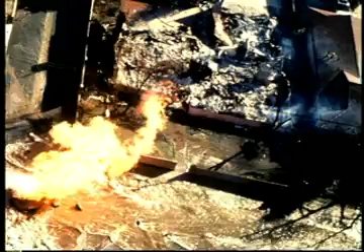Northridge, California, January 1994. For anyone that remembers that day, the images of devastation are frozen in memory. The earthquake destroys or damages infrastructure and buildings, but less than 100 people perish. Once again, modern seismic engineering has done well to protect lives.

Yet this earthquake is the costliest in U.S. history. Even though they save lives, buildings are left uninhabitable and must be demolished. Can seismic engineering do better to protect that infrastructure and preserve communities in the aftermath of an earthquake? That is what a consortium of the National Science Foundation, the construction industry, engineers, and universities is asking with the Precast Seismic Structural Systems, or PRESS program.

The PRESS program is one phase of a cooperative US-Japan program on large-scale testing of structures for earthquake and wind resistance. This particular program, which involved cooperative research between Japan and the United States on different aspects of the seismic performance of precast concrete, initiated about 10 years ago when I developed a plan for the US program.

The final phase is this large-scale test of a 5-story, what we call super assemblage rather than a building, to see how all the bits fit together and to make sure that when we test a real building that it does what we expect it to do. The key to the success and effectiveness of the entire program has been the partnership of industry and academia.

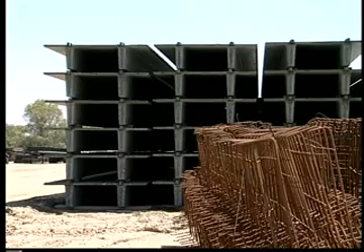The material which comprises this product is precast concrete, or precast, a hybrid system which combines the structural properties of concrete and steel to create a material with unique capabilities.

Precast pre-stressed concrete in a lot of ways is as different from concrete as wood is from steel. All concrete products have steel in them, regular what we call rebar, mild reinforced steel. Well, steel is best under tension. In other words, you want some tension on that steel for it to be able to work as it was intended. Concrete is best in compression.

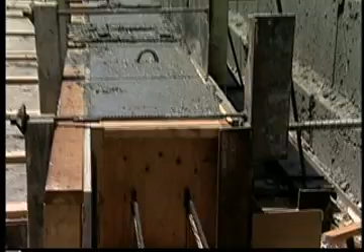So what we are doing with pre-stressed concrete, we use special strands of high tensile steel that is tensioned prior to pouring any concrete around it. We place concrete around that cable, and once the concrete has achieved sufficient strength, it actually bonds and holds on to that cable. So once it has that sufficient strength, we cut that cable.

Well, at that point, that cable is trying to relax. It's trying to go back to its original configuration or shape, but it can't because it's got the concrete bonding to it. So the steel is in tension, and the concrete, because it's holding this steel, is being forced into compression. So you have steel in its best application, tension, and concrete in its best application, compression, in pre-stressed concrete products.

Despite these inherent advantages, precast has not been traditionally used in seismic systems. PRESS will prove that with new designs, these advantages can be used to create better buildings. Precast concrete is not used all that much in seismic design in the United States at the moment in seismic areas, and the reason for this has been poor performance of precast buildings with inappropriate connection details in earlier earthquakes.

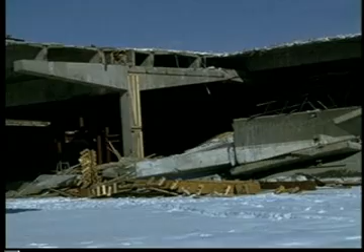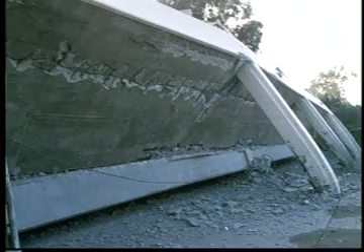In particular, in the 1964 Anchorage earthquake, it got a bad reputation as a consequence of that. Subsequently, it has performed poorly in a number of other earthquakes. The Armenian earthquake of 1988 is another example, and even the Northridge earthquake here in the States of 1994, some precast structures again performed poorly, again because of inappropriate connection details. And obviously we're trying to change that picture.

The way we've done a lot of the design of this structure is to try to make the deformations, the places where the structure has to bend and yield, happen in the connections between the different pieces. Now, if you're building a cast-in-place concrete structure, then there are no discrete connections between discrete pieces, and you don't really have that option. But with a precast structure, you can actually do that. And that's one of the lines that we've tried to take when designing this structure.

We are concentrating all of the inelastic action in the connections, which is quite different from the way in which precast concrete has been designed in the past, which has been emulating reinforced concrete, trying to make it exactly the same as reinforced concrete. We're not trying to do that. We're trying to make it quite different.

Standard construction for seismic systems requires that a building damage itself in order to save the lives of the occupants. Engineers do not try, in general, to keep a building intact after the earthquake. We allow structural damage. This is condoned by the code. This is what we're supposed to be doing in order to protect the lives of the occupants.

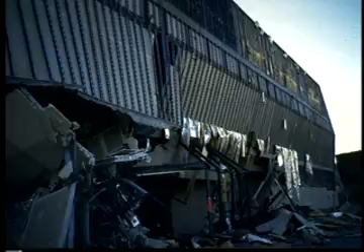The question is, how can you have a building that after an earthquake is still occupiable? That's not what people are getting now when they buy buildings that meet code, and any engineer will tell you that. These systems that we're testing here actually go a step further, and they're trying to minimize structural damage in the event of an earthquake.

To prove these new systems, the project's research tool will be the largest structure ever tested in U.S. history. It is known as the PRESS Phase 3 5-story test structure, and it will be put through the final trial in a unique facility at the University of California's Jacobs School of Engineering.

The Powell Structural Research Laboratories are a university research facility for the large and full-scale testing of structural systems and structural components. We have right now 4 large and full-scale testing laboratories which comprise the Powell Structural Research Laboratories, and with that it is the largest structural university laboratory anywhere in the world.

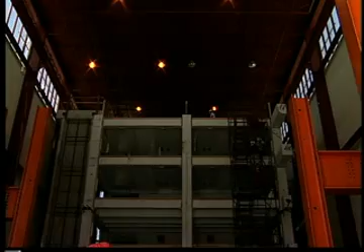This particular building is called our Structural Systems Research Laboratory, where we actually test full-scale structural systems, buildings up to 5 stories tall or bridges with over 100-foot length. We can test structures under simulated seismic loads here in our laboratories.

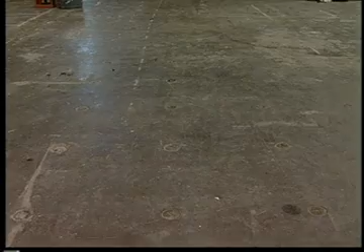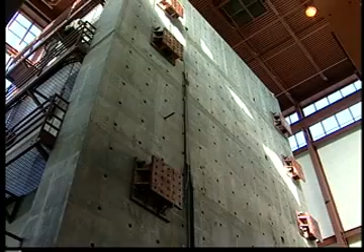For that, we really need very strong reaction floors and strong reaction walls, and this is really the key feature of that laboratory, that we have a 50-foot reaction wall against which we can load up to 5-story full-scale buildings under simulated loads all the way to failure.

The test structure is intricately designed to represent and test a host of new and different methods to join precast components into a robust and resilient structure, a structure known as a seismic system. In earthquake country, we need something called a seismic system. You need to resist the horizontal forces that the buildings get in the earthquake. And so you need a special system that holds the building up instead of letting it tip over like a house of cards. And what we're testing here are 5 different seismic systems.

One of them is a wall system, and the other 4 are 4 different frame systems. By frame, I mean things consisting of columns and beams. The point of this structure is to try to pull together a lot of the individual connections which have been developed and tested as individual connections over the past 5 or 6 years. And the intention here is to try to pull those together in a structure and then load the structure as if it really were being hit with an earthquake, to observe the way that the connections really work when you have them in a real structure and they're all tied together and all the pieces have to work together.

All the systems being tested in the structure utilize an emerging new seismic design philosophy. The design of the structure, or the prototype on which this test building is modeled, was using a new procedure called displacement-based design, which we've developed here at San Diego, essentially. And in this, we concentrate on trying to make the building respond to a particular level of displacement in an earthquake, rather than to have a particular strength.

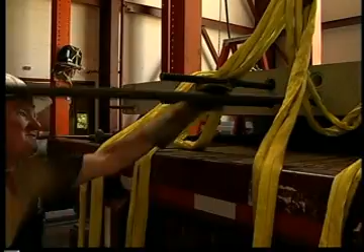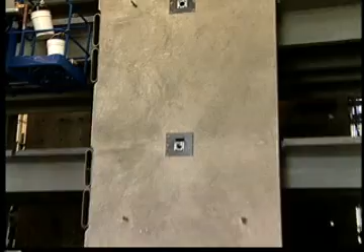And they're held down to the ground by what we call post-tensioning tendons. And these are essentially enormous rubber bands made of very high-strength steel. So they're not made of rubber, but they behave like a rubber band. And so you put the wall down and you have a tube down through the wall, or a duct, and you stress this steel through the duct, and essentially that kind of clamps the wall down on the ground. But if you push it hard enough, instead of something breaking, it'll simply lift off on one side a little bit, so the wall will kind of rock over like that, and then the big steel tendon down the middle will just pull it back up straight again when the earthquake loading disappears.

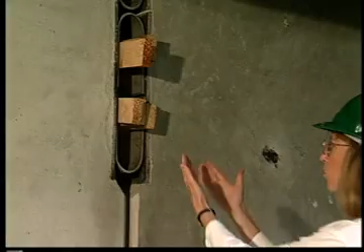This post-tensioning is in a sleeve inside the wall, and it is not grouted, it's not bonded to the wall itself. And as the earthquake hits the building, the wall panel just rocks back and forth, and this post-tensioning pulls it back to its vertical position. The thing that's unique about the system that's tested in this building is actually this U-plate connection. The U-plate connection used here in the interface between the 2 wall panels actually rolls as the panels rock back and forth. The U-plate rolls and it dissipates energy as it yields right in this region of the U-plate.

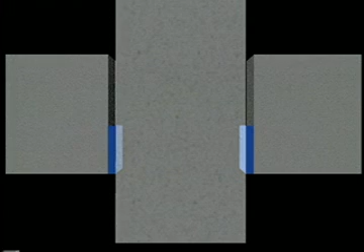The seismic frame systems will all be tested at the same time. The hybrid and pre-tensioned systems form the east side of the building, and the TCY and TCY gap connections form the west side of the structure. In the TCY gap system, there is a small gap between the end of the beam and the face of the column. The bottom portion of this gap is filled with grout to provide contact between the beam and the column. They are connected by two steel post-tensioning bars which run the entire length of the building, clamping the frame together.

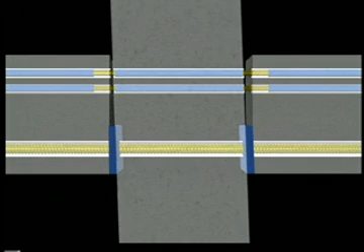At the top of the beam, regular rebar extending the length of the beam and through the column is grouted in, except for a short length at the gap between the beam and column. When the beam moves laterally in an earthquake, the gaps at either ends of the beam open and close an equal amount, maintaining the dimensions of the frame system.

Above the TCY gap connections on this side of the building, the TCY connections model a system that is similar to what is used in conventional cast-in-place construction. The TCY connection only uses rebar which is grouted in except for a short length at the beam-to-column interface. This connection is included since it emulates current use of precast beam connections.

On the other side of the building, an innovative concept called unbonded prestressing is used. In terms of the use of unbonded prestressing in precast structures, we might have a beam and another column on either side of it, and then another beam, which you can imagine each of these have been precast separately.

And then we have a series of ducts or holes right through them that we stretch some high-strength steel. We pass the high-strength steel, we grab it at both ends and anchor it to the ends of the system. And that puts compression across all of the construction joints, all of the joints between the beams and the columns.

Now, in previous prestressing of structures, normally the duct where the wire is passed through would then be grouted solid so that at all points along the length the tendon, that's the steel inside, is bonded to the structure, that's to the concrete. What tends to happen then is if you have a joint between, here's a beam on this side and a column here, as that joint opens up, it causes the prestressing tendon to gain a lot of strain and then go into the inelastic range. As it closes again, we lose some of the prestress.

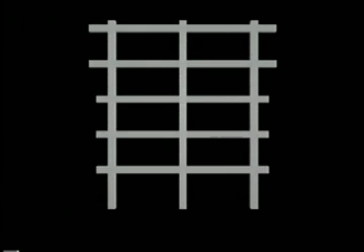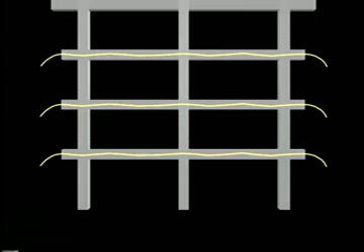Both the hybrid connection and the pre-tensioned beam, which form the east side of the building, use variants of Nigel Priestley's basic concept. The hybrid connections on the bottom 3 floors consist of beams which utilize unbonded post-tensioning strands that run the entire length of the building through a duct in the beams and columns. These strands are tensioned to clamp the frame together.

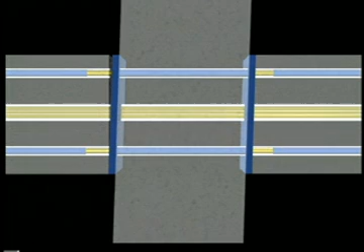Regular rebar at the top and bottom of the beam runs through the column and is grouted except for a short length at the end of the beam. When the beam moves laterally in an earthquake, the rebar yields, dissipating energy, and the high-strength strands remain elastic, moving the frame back to center after the quake.

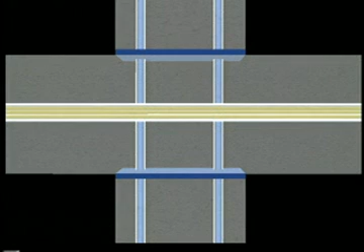Above the hybrid connections is the pre-tensioned beam system. It consists of long beams with pre-tensioning strands inside the beams, which are only bonded to the concrete at the ends. These beams are then set on one-story columns with reinforcing steel extending through the beams. As this frame displaces laterally, the unbonded strands remain elastic and recenter the structure after a seismic event.

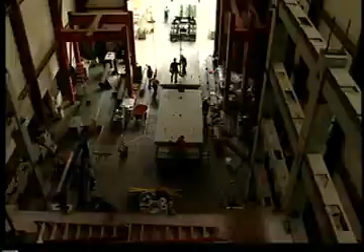All these various systems have been carefully integrated into a structure that is designed at 2/3 scale so that it can fit in the huge Powell Testing Laboratory. Even though it is the largest lab of its kind in America, one of the challenges of the entire project is erecting the largest test structure ever built within the walls of this cavernous building. It was the charge of this man, Randy Clark, who directed a team of only 6 workers to erect the entire structure in merely 9 days.

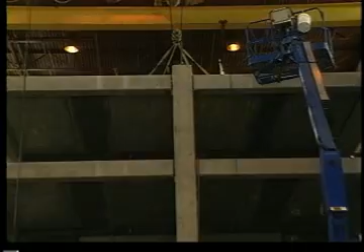The biggest challenge in erecting this building is the confinement that we're in within this lab, and the building fills it up quite a bit side to side. The structure consists of 8 columns, approximately 12 double T's, 20 floor slabs, hollow core and actuator panels, 4 wall panels, and the rest consist of several different types of beams. The heaviest piece was about 19,000 pounds, the pre-tension beams right up above us over here.

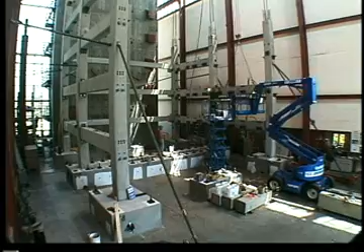We began the erection with the columns, and then we began to stabilize the structure by setting the beams along each floor at each elevation. And then we began setting the floor slabs.

The complexity is definitely due to the reason it's a test structure. They have 5 different building type systems and different types of connections that they're testing all at once in this building. And the crew's done very well so far as to get every piece in with all the necessary parts.

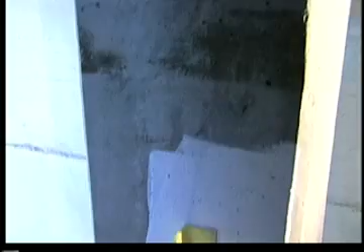The final steps in constructing the test structure are critical. Most important is the post-tensioning process, which will give the structure its innovative performance characteristics. But prior to the tensioning process, the joints and internal connections in the frame systems are grouted, establishing the tight tolerances between the frame elements and establishing the carefully calculated bonds between the concrete components and the internal steel, which will dissipate and control the seismic energy applied to the building.

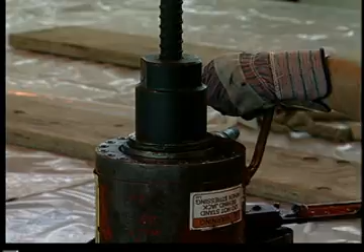With the grouting complete, the tensioning process commences. The nearly 50-foot rods in the shear walls are tensioned, the rods which will flex and then restore the shear walls to their upright position. In the frames, both the rods and strands are drawn tight, putting the steel into the optimum state to control seismic loads. The feat of installing the largest test structure is not all that must be done.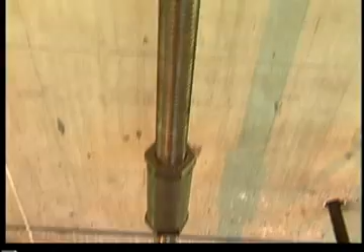A tower to support the actuators for the wall testing is constructed. The tower must resist lateral force like the immense strong wall. To accomplish this in the confines of the lab, the narrow tower is stressed to the lab's floor with high-strength steel tensioning rods running the entire 50-foot height of the tower and deep into the floor of the lab. The rods are tightened to apply 4 million pounds of force on the tower, thus increasing its rigidity and resistance to lateral force.

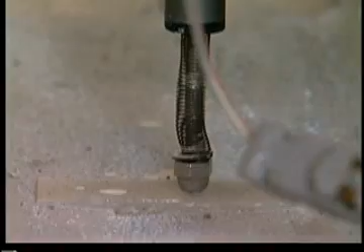With the tower and structure complete, it is time for the researchers to instrument the structure for testing. The building components already contain a multitude of strain gauges which were embedded during manufacture. Countless connections are made to the sensors. Gauges are placed to monitor every movement and displacement and to provide the critical feedback which will allow precise control of the test's immense forces. And finally, a device for instant reference is installed on the structure.

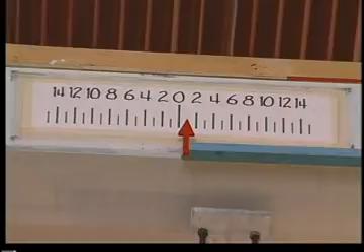The core objective of the testing is to study the structure's response to earthquakes. But how are the effects of a seismic event created inside a lab? Here at UCSD, the cadre of seismic design and testing experts has the ability to employ a technique called pseudo-dynamic testing to faithfully recreate the effects of an earthquake.

The principle of pseudodynamic testing is that we combine computer simulation and physical testing in one experiment. So we have a full-scale model of our building essentially on the test floor. That's the physical component. And then we have a second model of our building in the computer. And in the computer model, we introduce then the actual ground motion.

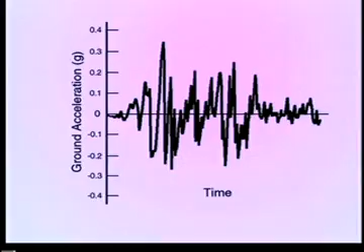So we expose the building in the computer to a ground motion time history, which is pre-recorded from some other earthquake. And then we calculate in our computer model at a certain time step, let's say 1/100th of a second into the earthquake time history, the displacements at each of the 5 floor levels in our building. And then we send these displacement signals to our servo-controlled hydraulic actuators, which are arranged between the building and the reaction wall. And we move these actuators to these displacement levels. So we put the building in the calculated displaced shape.

The reason that we can slow the earthquake down in this form of testing and still have valid results is because we ensure that the sequence of displacements that we put on to the building is the same as would happen to the structure if it was tested at a faster speed, in other words, at the correct loading rate for the earthquake. And damage is related to displacements rather than forces or anything else. So if we take it to the same displacements that would happen in the real earthquake and in the same sequence, then we get the correct levels of damage.

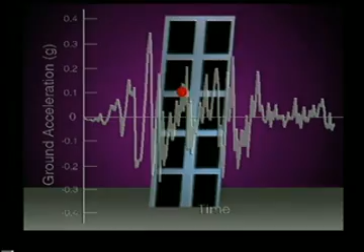In fact, we get slightly more because it's more severe on a building to hold it at the large displacements for a period of time than it is just to achieve it for a fraction of a second and take it off. So it's slightly conservative, but it is realistic.

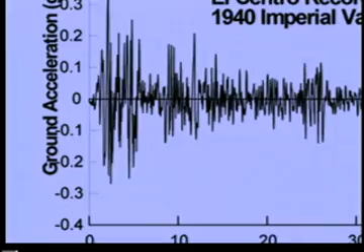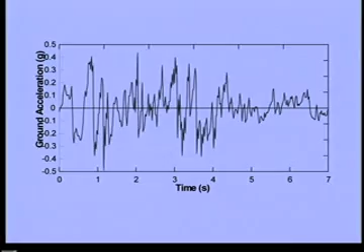The simulated seismic events for the pseudodynamic process are derived from a select variety of actual earthquake records, among them the 1940 El Centro earthquake record. These records are then modified to ensure that the structure is thoroughly subjected to the required levels of seismic intensity and beyond. The mechanical means which will bring the earthquake record back to life are the actuators.

Well, these actuators are kind of like the rams you see on bulldozers moving the blades or on any kind of earth-moving equipment, except that these have electronic controls. For this particular test, we have 10 different actuators. We have 2 at each floor level. They come in different varieties with strokes from plus or minus 6 inches for the first floor, all the way up to plus or minus 24 inches for the top floor.

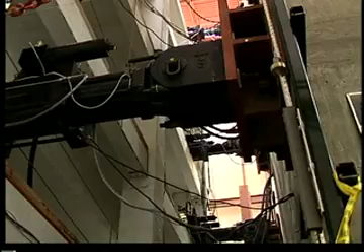The actuators on the first floor have a 165,000 pound load capacity. Those at the top floor have a 220,000 pound load capacity. This actuator here, for example, can push with a load of 165,000 pounds. That's something around the weight of like a 727 or a 737 jet aircraft. The actuators are kind of unusual in that we have this combination of really large forces, but yet we're able to control them down to very, very small displacements on the order of 1,000th of an inch.

In the control room during the test, there'll be 5 of us. There'll be me. I'll be controlling the actuators and monitoring the health of the actuators and the data acquisition systems. There'll be Sri. He's monitoring what's actually going on during the test and conferring with Dr. Priestley to make decisions about what we're going to be doing next, whether the structure is behaving as we want it. There will also be 2 graduate students, Jim Conley and Stefano, and they will be doing close to real-time analysis of what's going on in the structure.

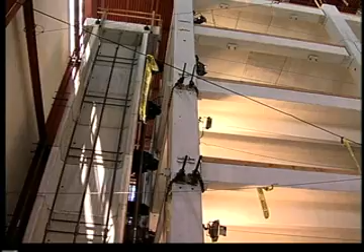The test actually takes place in several intermediate tests, and between those tests, these 2 graduate students spend a lot of time helping us make decisions about what we want to do on the structure next. The structure is ready for testing. 12 years and countless hours of design and preparation have gone before. The testing begins. Time-lapse footage compresses the process.

The team watches closely, monitoring the activity of the actuators as well as the response of the structure. A graphic display shows the amount of force the actuators are exerting to produce the target displacements. As it is subjected to the first loads, the structure makes evident its response to being displaced. I think it's probably the pins, I guess, is it? Something slipping in the pins, I think. Yeah. Okay, just hold it there for a minute.

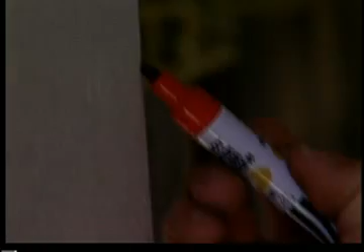The structure shows other evidence of its response to the seismic loading. Throughout the entire testing process, the team will inspect the structure for any cracking. The cracking doesn't affect the integrity of the structure, but the evolution and character of the cracks will help the team understand where and how forces were distributed in the structural elements, and how the structure is responding to seismic displacement. They carefully mark the occurrence of the cracks, eventually leaving the structure graffitied with a glyphic record of its performance. The structure successfully withstands the design-level earthquake requirements. We are right on.

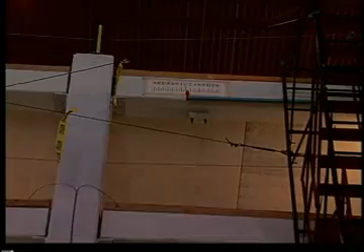Now it is crunch time. It will be taken to the extreme. The displacement will be equivalent to an earthquake which might occur once a millennia. The top floor of the building will move over 11 inches from center, or over 22 inches back and forth, much greater than the movement which occurred in only a few seconds in El Centro in 1940. A few seconds which had devastating consequences. Here, the duration is a matter of hours. Yet the structure is actually subjected to more stress than in that real seismic event.

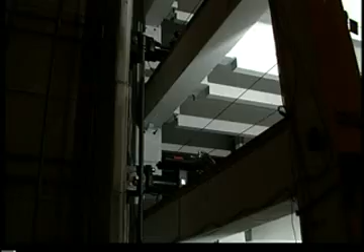As the test progresses, displacement becomes clearly evident. The flex plates in the walls bend as designed. The top floor moves further and further from center. The columns clearly leaning. At the height of maximum displacement, the researchers clamber over the structure. Floor by floor, they inspect and record evidence of the displacement's effect, so they can later correlate it with the data gathered by the instruments.

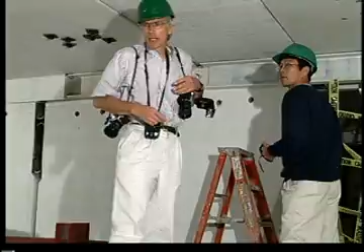Yeah, we got the torsional crack in the floor. You got a torsional crack now? In the floor, yeah. 0.1 millimeter. Not going to get too excited about that. Think bigger?

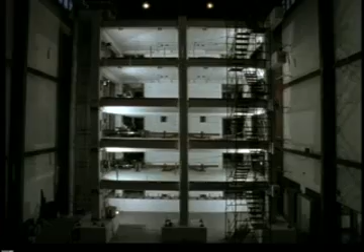Time-lapse footage reveals how the pseudodynamic testing process eerily recreates the earthquake. The building experiences the first seismic wave, and then suffers a remarkable displacement, and continues to sway with subsequent seismic waves. But the walls, frames, and floors stand, and by all accounts, don't even approach a loss of integrity. The lack of damage has surprised even me. It's been less than I expected, so it's just been great.

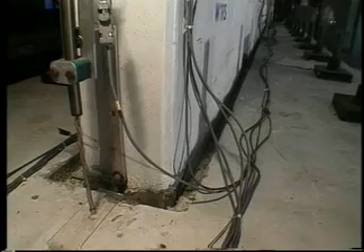It's a superb test. It's amazing to me how little damage, how little distortion, things are able to move the way they're supposed to without anything bad happening. And if you had this kind of an earthquake, of course you're going to run out into the street probably when it's over, you're going to come back in and see architectural and interiors type damage, but the building structure is going to be fine and you'll be able to go right back to work. And I think that's amazing for an earthquake this size on a building.

If this building had been in Turkey, at Izmit, pretty much at the epicenter, I believe that this is about the kind of level of deformation it would have seen there, and at the moment it looks like it's coming through with barely a crack in it, which is, I think, what a lot of people out there would have liked to have been in a building like that.

There's no doubt that the level of shaking represented by what we've put onto this building is well above the design levels for buildings in California. But it seems that the performance we're seeing at this displacement is actually much better than I'd even dreamed. Some of the very critical connections seem to be performing absolutely perfectly, and places where I expected to see some cracking in the concrete, not dangerous, but at least cracking, we don't seem to be seeing it.

So the building is doing just astoundingly well, as far as I can see. And I'd be very happy to live in a building like this in a big earthquake. What else can I say? Next in line for the battery of tests are the 4 frame systems joining beams and columns that make up the east and west sides of the structure.

In the frame direction, we've got 4 different structural systems connected by 2 different floor systems. Each of those has anywhere from 6 to 9 different connections involved to provide that seismic resistance. There's just more bits and pieces and more connections in the frame direction, so there's more potential for things to go wrong. We certainly hope that they won't, and we don't expect them to.

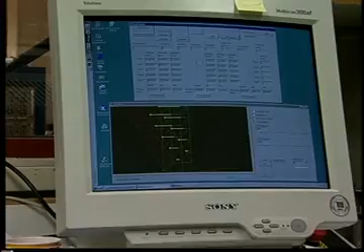To accomplish the next series of tests, the entire complement of actuators must be moved from the reaction tower and attached to the huge strong wall so the building can be pushed in the frame direction. After shakedown and calibration, the researchers are ready to get underway. The first tests take the structure up to a level 2 earthquake record, equal to events which might occur once every 50 years. The various framing systems are performing well.

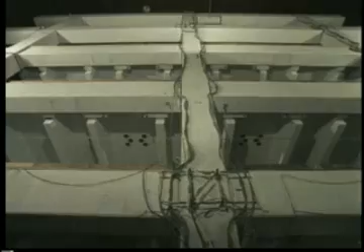This time-lapse footage clearly shows not only how flexible concrete can be, but it once again illustrates how effectively the pseudo-dynamic process recreates the dynamics of the earthquake record. The researchers then take the structure to the 500-year seismic event. The top floor is displaced about 10 inches from center, giving the structure a tilt, which is clearly evident, even to the casual observer.

The structure easily survives the design level tests, but begins to reveal its secrets. Nigel Priestley comments on its performance and what is yet to come. We've completed loading in the frame direction at the design level earthquake, which is equivalent to the maximum intensity design event for California. And the structure has performed well. The pre-stressed frame looks extremely good at this stage. There's very little spalling, the cracks are very fine.

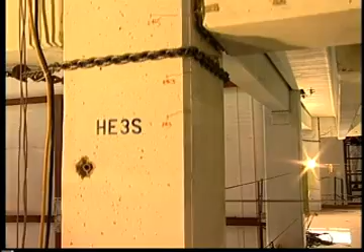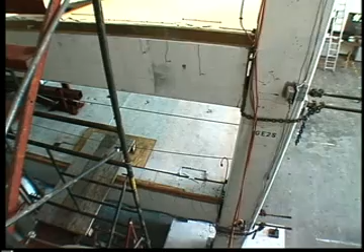The other frame is not behaving quite as well. It's behaving fairly well, but we're having some problems with the beams slipping vertically at their ends where they butt onto the columns. We can see why that is. It's a small deficiency in the design approach. We need to be more conservative. The strength is still as high as predicted, but we're seeing some spalling of concrete, particularly in the frame on my right-hand side, which is not unexpected.

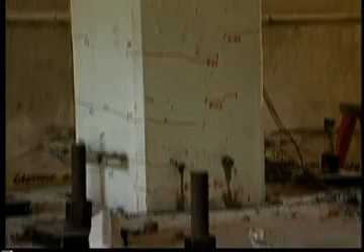We do expect the cover concrete to spall off, but the core, which is inside the reinforcing steel, to remain strong. It looks bad, but it's really not. The strength is still there. However, we want to go up to higher levels of loading, and there are some aspects which are causing us concern.

Perhaps on the pre-stress frame, which is on my left side, what's happening there is that the floor system, which consists of double T beams, which is supported on the side of the main pre-stress beams, is causing them to twist a bit. So what we're going to do, and what we're seeing up there, is some welders providing some weld metal, and that will stop any further twist.

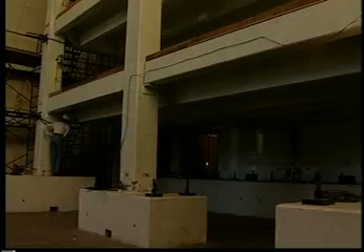It's something very important that we've learnt, and it's part of the reason for testing big structures like this, is that you always find out something unexpected which may change design practice in the future and improve safety. The next step in our testing, which we'll start next Tuesday, is to take the structure to levels of seismic displacements which are significantly bigger than expected in the design earthquake.

The structure is designed for a maximum drift of 2%. What we want to do now is to take it to 3% drift, so a margin of safety of something like 50% above the design displacement, and see how it performs at that level. Assuming that it performs well there, we'll then take it up to 4% drift, or twice the design level.

If it's still standing and intact at that stage, we'll call it a day, because we won't be able to apply displacements any bigger than that. We've run out of capacity in our actuators.

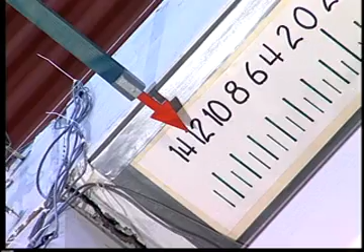At that 3% drift, or 50% above the design displacements, the top floors are pushed close to 12 inches from center. At this level of displacement, well beyond what the framing systems were designed for, the various systems start to show their superior performance characteristics. The pre-tensioned beams and hybrid systems perform extremely well, without an increase in significant damage.

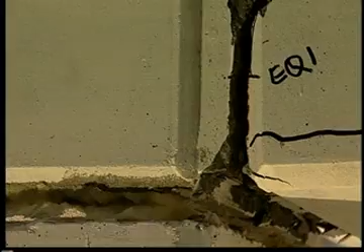So it's close to 7/16 inch crack, and I think, as I said earlier, it's all concentrated here, and you don't get any crack on the beam at all. So it's performing as it was expected.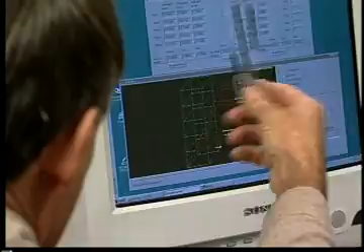As in all good research, the team wants to probe the limits. They follow their plan to take the structure to 100% greater displacement than the design level. The top floor will be displaced 18 inches from center, the kind of displacement which might occur once every 2,500 years. The test gets underway. The researchers watch closely, monitoring the actuator systems and state of the structure.

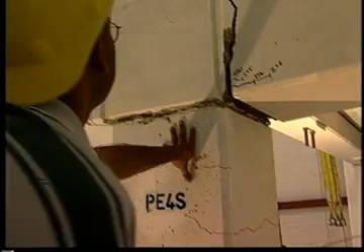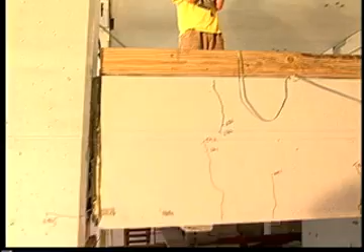At the extremes of displacement, the team inspects the structure. There's quite a lot of relative movement there. Diagonal shear crack on the joint, the exterior joint. These welds all look okay. PE4S, one of the bottom rebar fractured. Outside of it. So outside one. The test continues. As the strains increase, the structure responds with eerie creaks, cracks, and booms.

To accomplish the extraordinary displacements, the team must pause the test and adjust the huge actuators. The actuators at the third floor level don't have sufficient stroke when we're moving the top floor 18 inches. So what we have to do to accommodate that is, when we're at zero load, we push the actuator out a certain amount and put the pin into another location, which gives us 3 inches extra travel. So it extends the travel in each direction from 9 inches to 12 inches. We only need about 10 inches, but the 9 inches isn't enough.

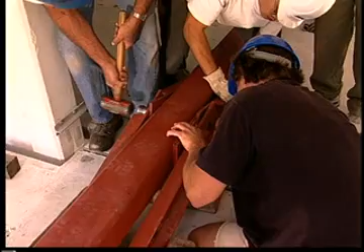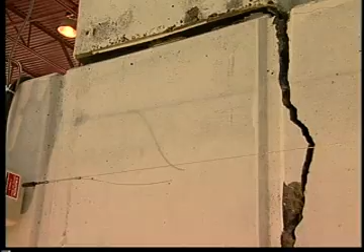This is the maximum that we want to go to. In the first push to 18 inches, we got 4.5% drift, and the design drift is 2%. So we're pretty happy with that. With the actuators reset, they are again set to task. The structure is reaching phenomenal displacement. The joints, where by design the stresses and damage are concentrated, start to show some effects. Concrete spalls, crushed at the joints between columns and beams. Rebar under tension snaps like immense rubber bands.

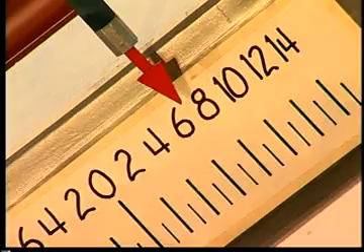Then, on the second full cycle of drift, something happens. Judiciously, the test is halted. The structure is allowed to settle. Yeah, I could fire those guys up and let them come to zero load. Let's do that. All right. As far as, the test's completed now. The team has taken the test far beyond the limits of expectations, into a realm which few structures have entered, and remained standing.

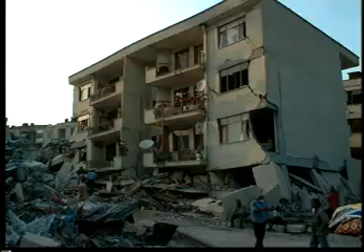There was an earthquake in Turkey about 3 weeks ago which caused a huge amount of loss of life, and it was considered a great earthquake. Well, it had a magnitude of something like 7.4. What we're looking at is something significantly bigger with a significantly higher ground acceleration. The Turkey one had a maximum ground acceleration that I saw of about 0.3 G, which really isn't all that big. And what you're talking about here at this 4% drift is probably something with a ground acceleration on the order of about 0.6 or 0.8 G, possibly even a little higher. So you're talking about ground accelerations which are 2 to 3 times the one which just occurred in Turkey. We've actually taken it to more than 100% past the design level displacements, and normally we would say that is equivalent to probably a 2,500 year return period event.

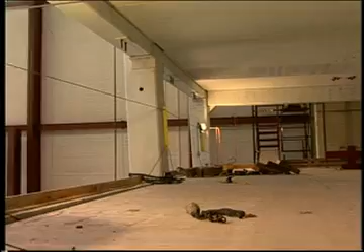If we think about what we should expect the building to look like at the end of this, well, I would expect it to look like a real mess. And in fact, quite a lot of it doesn't look like a real mess. Quite a lot of it still looks in remarkably good condition. The wall direction has been a real winner, much better than we expected it to be. So that's the first thing that really comes out of it.

The frame direction was a very much more complex area. We had 4 different structural systems involved in this. 3 systems essentially worked very well. They're the 2 systems on the pre-stressed side, and the tension compression yielding, which is at the top of the TCY system. The one that didn't perform quite as well was the TCY gap system. And that's been interesting. We've learned a lot from that.

We know how to improve the performance there, and we believe that even though the performance has not been as good as we might have liked, it hung on there. And the point is that it was taken up to drift levels more than twice the design level. I'm really, really happy with the results.

We had incredible results with the wall direction. We all left here, at least I left here, feeling ecstatic about the wall direction testing. We came back, we tested the frame direction, which was much more difficult from both a complexity and a prediction perspective, and also from the actual results we got.

Things weren't quite as perfect as they were in the wall direction, but still we got excellent results and have a lot of really good data to analyze. It's going to take a long time before we really know everything that happened in this building.

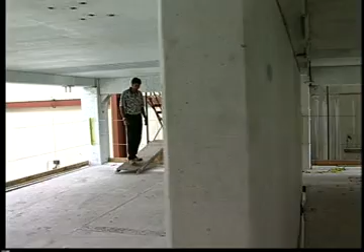After the structure is cleared of apparatus and instrumentation, project scientist Sri Sritharan takes the first step to understand what really went on in the test structure, revealing the effects of the seismic stresses as well as the performance and resilience of the designs.

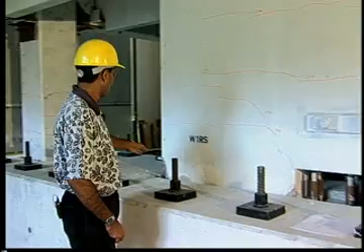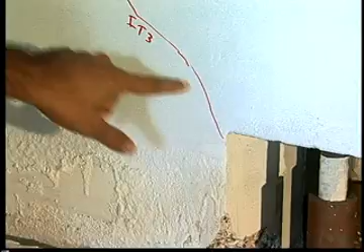The only damage that occurred to the wall system during the wall direction testing was just spalling of cover concrete in the corners here. You could just patch it up if you wanted to, and you're ready for the next earthquake. There were some minor cracks that we marked here that opened up and they closed when we removed the load. On this side we marked all the cracks, and we'll take a look at it on the other side. You will see there is no damage that you could visibly see.

Right now we are looking at a hybrid joint system where the column to beam connection is established with unbonded post-tensioning, similar to what we have seen in the wall system. You could see there's no damage to the joint region where the maximum forces are transferred through.

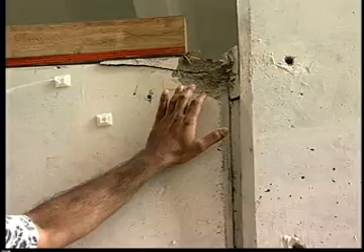The damage we see here at the top and bottom, in a design level earthquake, we will not see any damage like that. Part of the reason why we see this damage was that we took the structure to much larger displacements. At one point we moved the top of the column by 18 inches, and that's the reason we see some damage. And again, this is not structural, so we could easily patch up this damage as well.

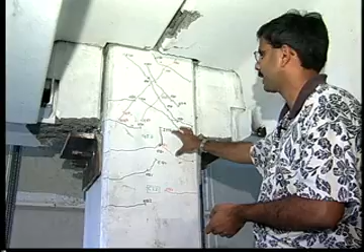So we're on the first floor of the building now, looking at the second floor TCY gap interior joint system here. The TCY gap system performed as they're supposed to perform during seismic loading. However, we learned that the amount of compression that we provided here by the tension rod that passes through here at the bottom of the beam did not have adequate tension, and as a result we started to cause some damage to the bottom of the beam.

And since we continued the test all the way to 18-inch displacement, you could see that we spalled off more concrete here than what should have been if we had had slightly more post-tension here.

We are now looking at a pre-tension frame connection. Unlike the other precast system that we have looked at, here the beam is continuous, which contains the joint as well. So it runs from one end of the frame to the other end. In this system, the crack was supposed to develop between the joint and beam, even though the whole piece was constructed as one segment. And that's exactly what happened during the test.

And you can see the crack develop right at the interface, and the crack opened up all the way to 3/8 of an inch for the maximum earthquake load being imposed onto the building, and now it's almost completely closed. The pre-tension system performed exceptionally well, as we expected from the design.

The success of the PRESS program has been a defining event, which promises to propel seismic engineering, design, and science forward. What lies over the horizon? It's always tempting to believe that we've just about finished all we need to do in earthquake engineering, but I suspect that people thought that in the 60s. The prediction was then there would be no more need for doing any testing in 10 years' time. Everything could be done by computers.